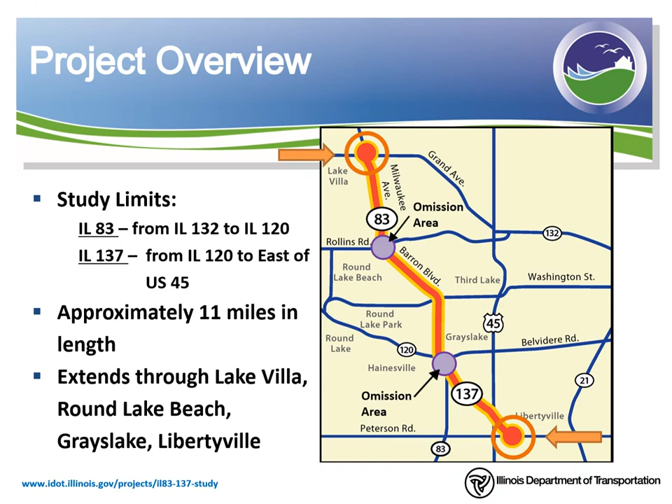This study will identify transportation needs along the corridor, collect information about a variety of resources, develop a broad range of transportation solutions, study and document potential effects, and recommend transportation improvements that benefit residents, businesses, and the traveling public.

Not to be confused with the Restore Illinois phases associated with COVID-19, IDOT develops highway transportation improvement projects in 3 IDOT project phases. The Illinois 83-137 study is currently in Phase 1, in which preliminary engineering and environmental studies are completed to develop an improvement of the roadway that addresses an established purpose and need for the study.

Phase 2, Design, consists of refining the design to develop contract plans and land acquisition. Phase 3, Construction, consists of the actual construction of the project. The contract plan preparation phase, Phase 2, is currently funded and will begin upon completion of the Phase 1 study.

Funding for land acquisition and construction is not included in the department's fiscal year 2020 through 2025 proposed highway improvement program.

IDOT will consider all input from stakeholders throughout the Phase 1 process to support in the development of viable solutions. IDOT utilizes context-sensitive solutions, or CSS, to engage and inform the community. CSS is a collaborative process to involve stakeholders in decision-making. This coordination helps to ensure that the planned improvement fits into its surrounding, also referred to as its context.

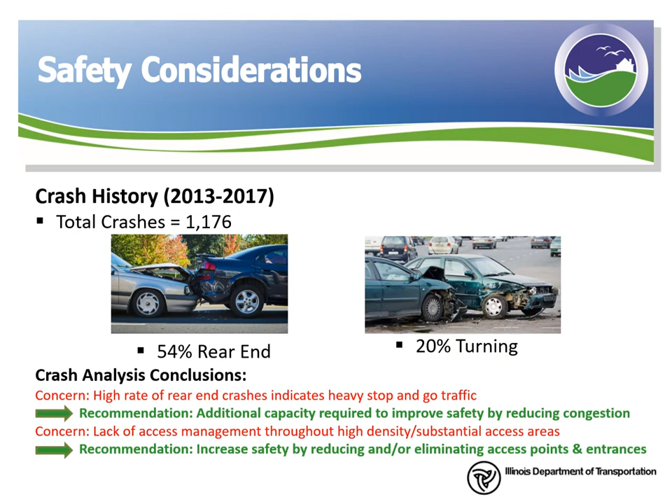To determine the mobility within the corridor, the existing traffic volumes are measured and future volumes projected. The existing needs can then be determined and alternatives developed to provide the capacity to meet the required design criteria. Traffic capacity and the associated traffic congestion are defined in terms of levels of service, or LOS.

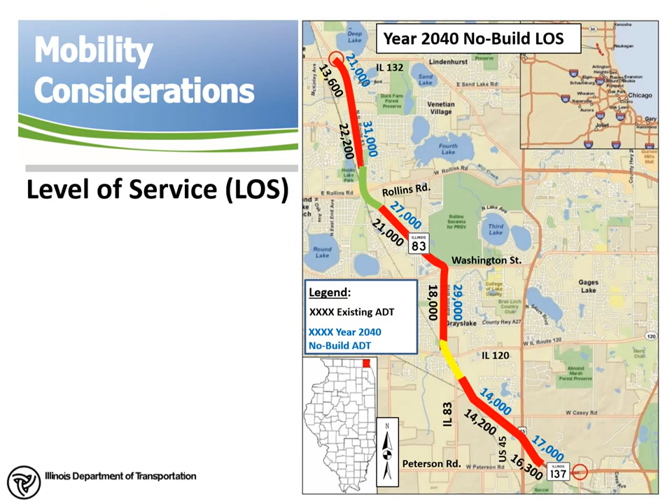The level of service is expressed by a scale ranging from A to F. Level of service A represents the best traffic condition with no backups or obstacles to traffic flow, and F represents a total breakdown in traffic operations accompanied by extensive delays and traffic volumes that approach capacity.

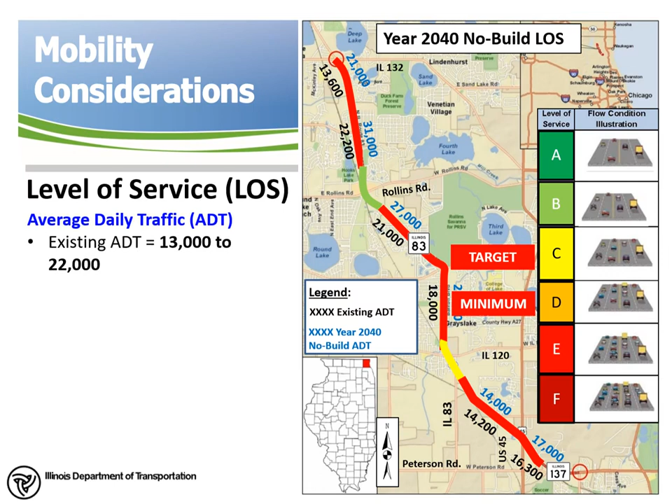The design requires that the projected 2040 traffic capacity along the corridor have a minimum level of service of D and a target LOS of C or higher. The existing traffic volumes along the corridor range from 13,000 to approximately 22,000 vehicles per day and currently have a level of service of E.

The traffic volume is projected to increase to between 14,000 and 31,000 vehicles per day by year 2040. If no improvements are completed, the projected level of service will remain below the acceptable level in most areas along the corridor. The only areas where acceptable levels were found is where 4 or 5 lane improvements have been completed or are planned to be completed.

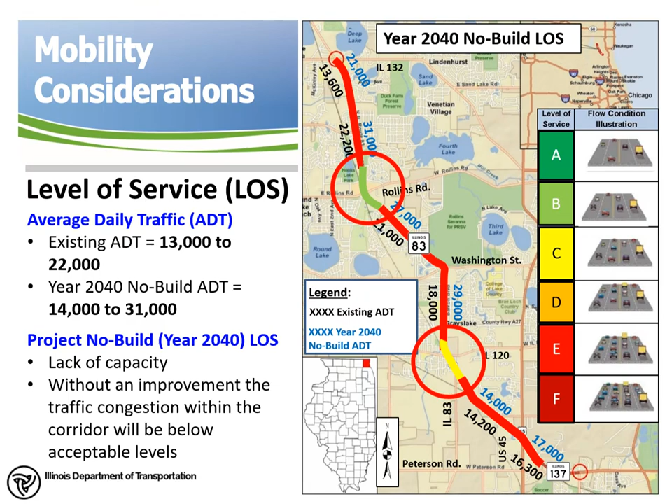Multimodal opportunities were identified as another need along this corridor. Because of the residential and commercial land use found along the corridor, as well as the frequency of parks, schools, bike paths, Metra stations, and intermittent sidewalks within the area, the inclusion of bicycle and pedestrian facilities along the corridor would provide an alternative means of travel and access.

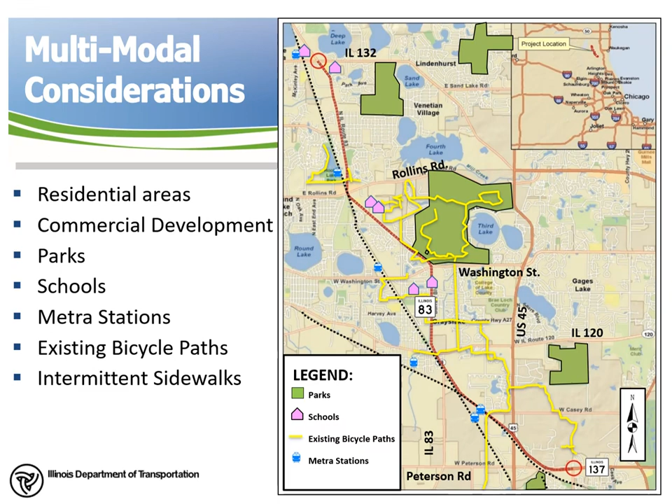The alternative development process is a multi-step process of developing, improving, screening, and eliminating alternatives until a preferred alternative is selected. Throughout this process, IDOT utilizes CSS to keep the community engaged in the project, which helps to ensure the preferred alternatives fit the needs of the community.

The process begins by screening initial alternatives to make sure that they meet the purpose and need of the project and that they do not have fatal flaws. Following this screening, the alternatives carried forward are evaluated in greater detail. Then the alternatives and their associated impacts will be further refined and subsequently screened until a preferred alternative is selected. This is where we are now in the process.

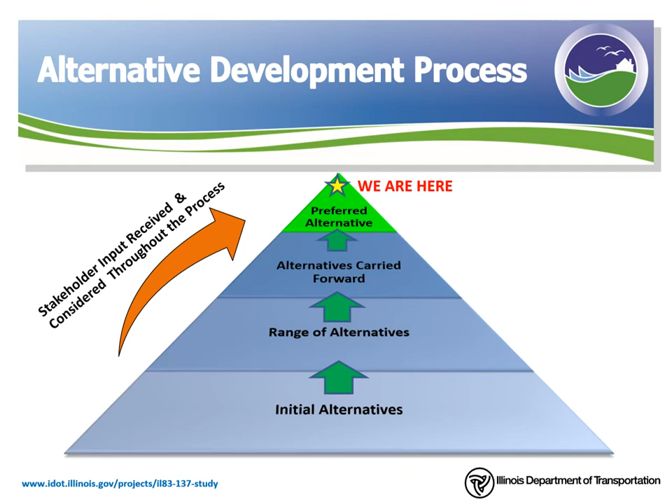The consideration of both environmental resources and engineering design elements found within the corridor is an integral part of developing a range of alternatives that provide viable options for improving the roadway corridor.

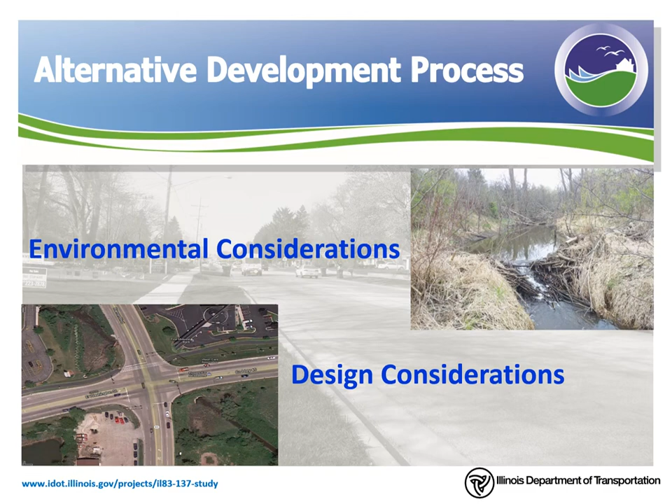This project is being developed in accordance with the National Environmental Policy Act, or NEPA. The environmental impacts of potential alternatives are a critical component to the overall alternative development process. The purpose of NEPA is to ensure that environmental factors are weighed equally when compared to other factors in the decision-making process. For federal funding eligibility, NEPA compliance is required.

A full range of reasonable alternatives are evaluated, including the no-build alternative, along with comprehensive environmental review to avoid, minimize, and mitigate impacts.

Environmental surveys were collected throughout the project area so that we could identify impacts as we develop alternatives. By identifying these environmental features, we can better determine the alternatives that best serve the purpose and need of the project while minimizing environmental impacts.

Environmental features include the following: wetlands, protected species and habitats, floodplains, historic sites and cemeteries, 4F resources, parks, recreation areas and refuges, forest preserves, 6F Land and Water Conservation Fund Act (LawCon) resources, outdoor recreational resources, community and social resources, environmental justice communities, and relocation impacts.

This study is being processed as an environmental assessment, or EA, which assists decision makers in determining if a federal project's impacts are significant. The alternatives will be identified and analyzed to identify the alternative that best meets the needs of the project study area, while avoiding or minimizing environmental impacts. Upon completion of the EA, a finding of no significant impact, or FONSI, is anticipated, which will complete the environmental studies for the project.

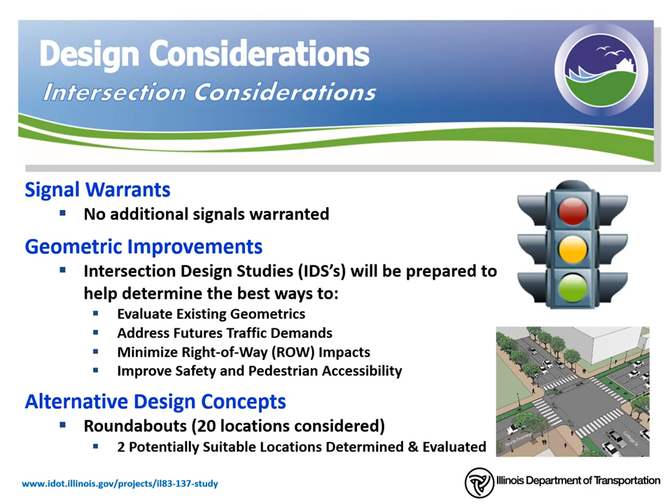The effectiveness of the alternatives depends on many factors, but is evaluated by how well they address the purpose and need. 2 of the primary factors identified in our purpose and need are safety and mobility.

Access management is the control of the location, spacing, design, and operation of driveways, median openings, and street connections to a roadway. The purpose of access management is to help balance safety and mobility by reducing the number of conflict points and traffic congestion.

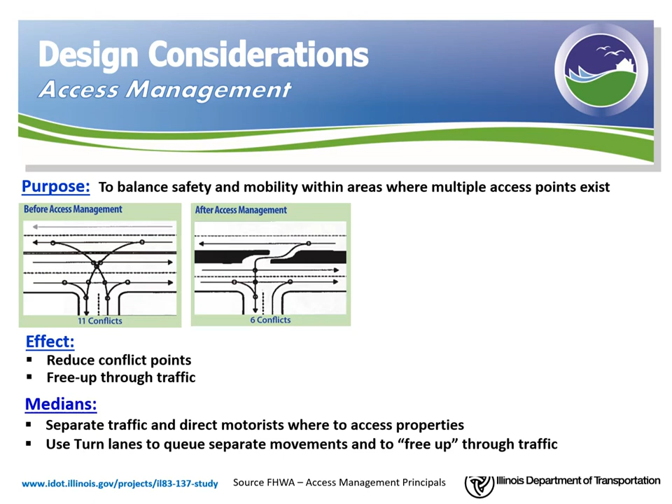An increased number of driveways within a corridor increases the likelihood for crashes to occur. Raised medians are a key tool used for access management. Raised medians separate traffic and direct motorists where to access properties so that turning and crossing movements occur at fewer locations. Additionally, raised medians provide opportunities for improving aesthetics.

U-turn bump outs are provided at locations that were coordinated with local officials to provide additional access opportunities.

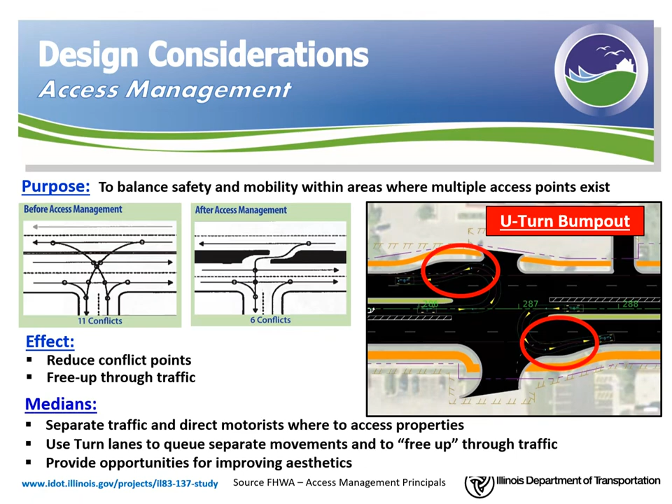The lane configuration was also studied throughout the corridor by developing initial build alternatives, which included a 2-lane alternative with 1 through lane in each direction and a center turn lane, and a congestion management process (CMP) alternative were evaluated.

CMP strategies have been incorporated into this project where practical, including increased turn lane storage capacities, traffic signal modernization, consolidation of access points, streets, and driveways, channelized intersections with left and right turn lanes, adding multi-use paths and sidewalks, and raised curb medians.

3 basic types of 4-lane alternatives, all of which have 2 through lanes in each direction, were also developed. These alternatives include various median types such as a raised curb median, a flush median center turn lane, and a depressed grass median, which is used in low-density development areas with increased speeds.

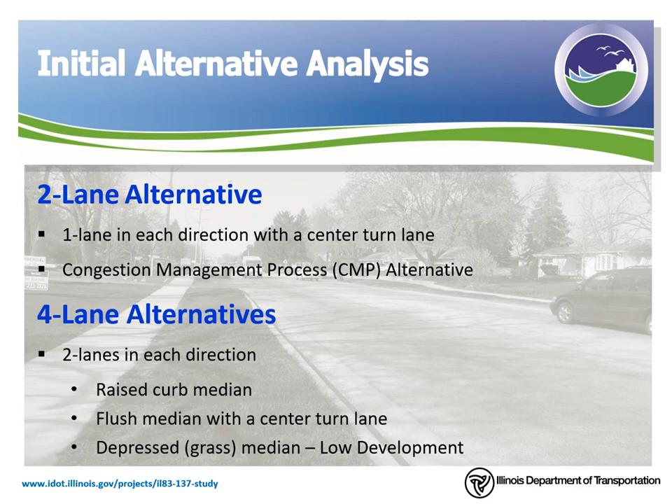To determine the feasibility of a 2-lane alternative, it was modeled to determine its capacity. As previously stated, the design criteria require a projected 2040 traffic capacity level of D or higher. The 2-lane roadway model produced a level of service of E where they were used within the corridor.

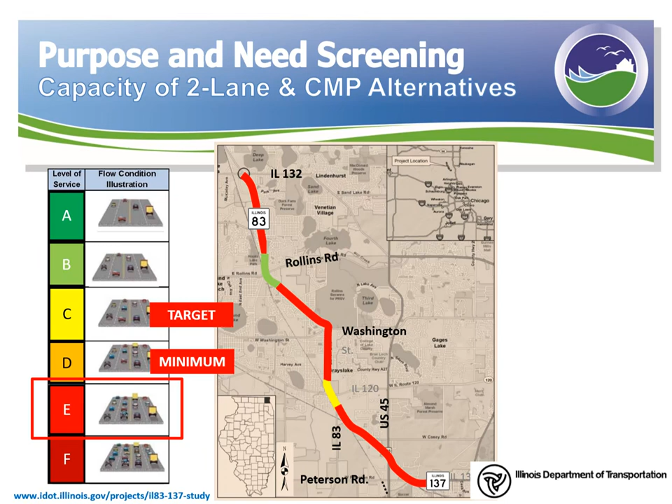The 2-lane alternatives with center turn lane and the CMP alternative were found to not meet the purpose and need of the project because the alternatives retained 1 through lane in each direction, and the additional roadway capacity was determined to be needed in order to improve safety by reducing congestion. Therefore, these alternatives were dismissed from further consideration.

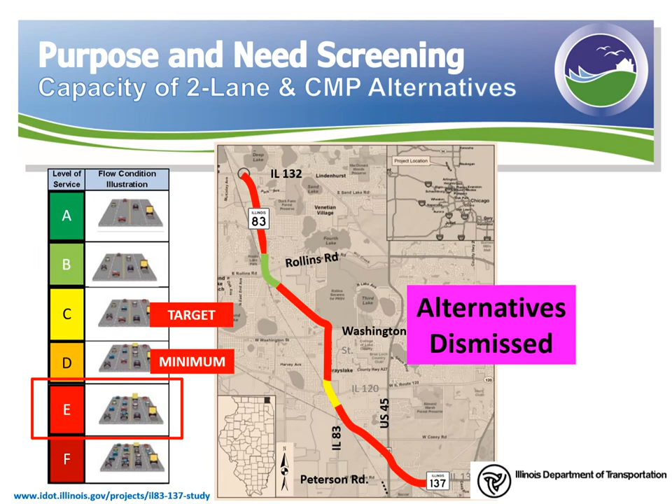Similarly, the no-build alternative does not meet the purpose and need of the project, but will be retained through the environmental review process as a comparison for study.

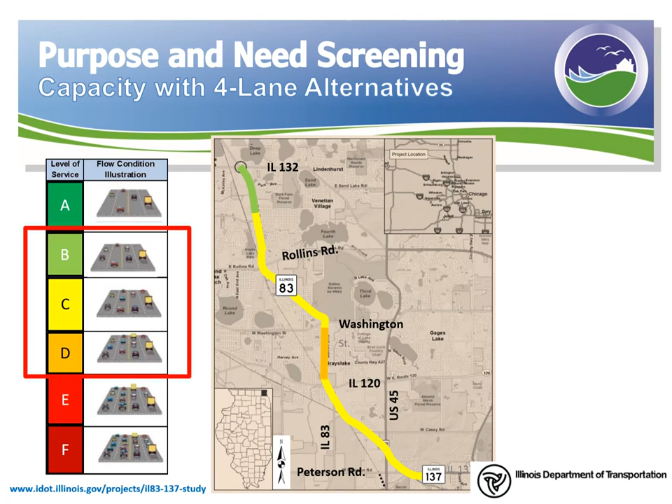To determine the feasibility of 4-lane alternatives, they were also analyzed to determine capacity. The projected level of service in these areas with a 4-lane improvement was found to be between a B and a D. Since the 4-lane alternative provides suitable mobility, 4-lane design alternatives will be used for the range of alternatives.

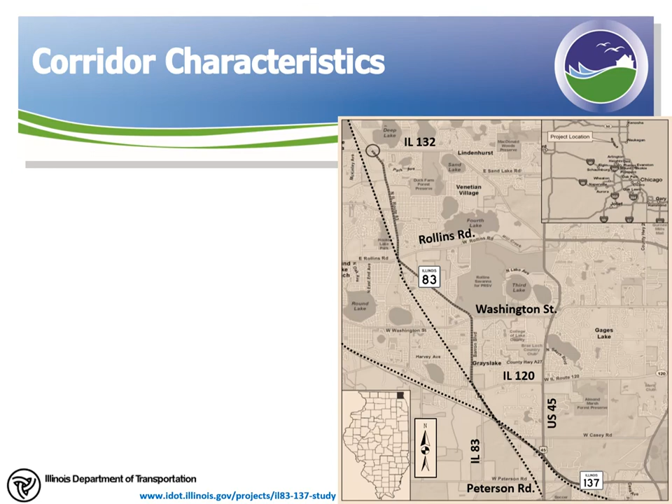The characteristics of the corridor are important to identify the elements used in the alternatives. The land use varies significantly along the corridor. To develop alternatives that more closely align with the land use in the various areas, the corridor was first divided into 3 sections.

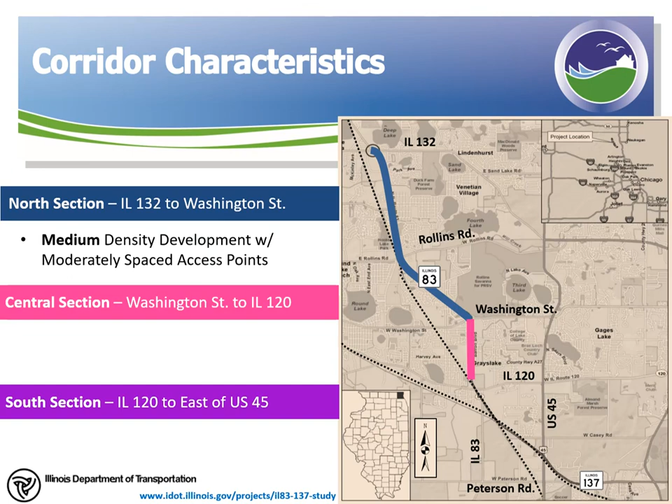These are referred to as the project's north, central, and south sections. The north section extends from Illinois 132 to Washington Street and is made up of medium-density development and property access with speeds of 45 to 55 miles per hour. The central section extends from Washington Street to Illinois 120, is highly developed, and the most densely populated section of the corridor, having substantial property access with reduced speeds of 35 to 40 miles per hour. The south section extends from Illinois 120 to east of US 45, is made up of low-density development and property access with increased speeds of 45 to 55 miles per hour.

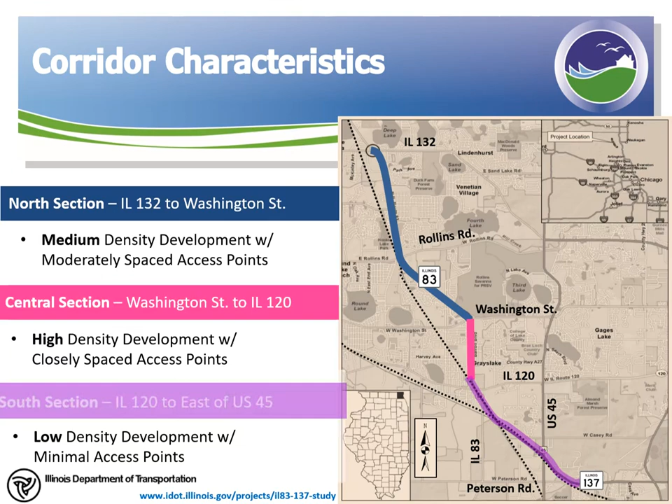By dividing the corridor up this way, we could better focus on the alternatives in those areas that will better serve the community.

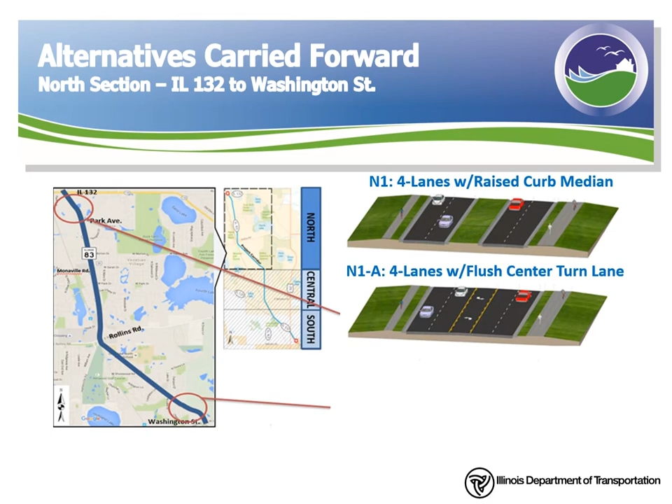In the north section, there are 3 alternatives carried forward. The N1 alternative is a 4-lane cross-section with a raised curb median, which can be considered the typical section throughout the majority of the north section. Due to frequent access points onto Illinois 83, the N1A alternative was created and provides a flush median, center turn lane, in the northernmost section of the corridor just south of 132. This alternative narrows the footprint and would provide more access.

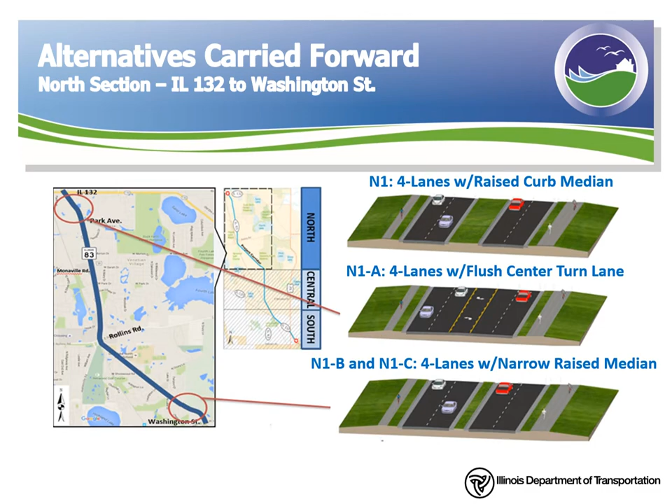Due to environmental concerns, the N1B and N1C alternatives were created and provided a narrower raised curb median with reduced lane widths. All 3 alternatives primarily follow the existing centerline alignment, having outside curb and gutter, and include a multi-use path along the east side of the roadway and a sidewalk along the west side of the roadway throughout the length of the section.

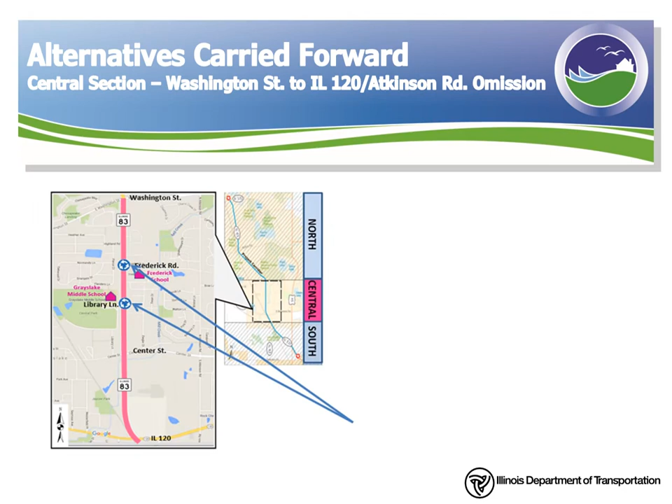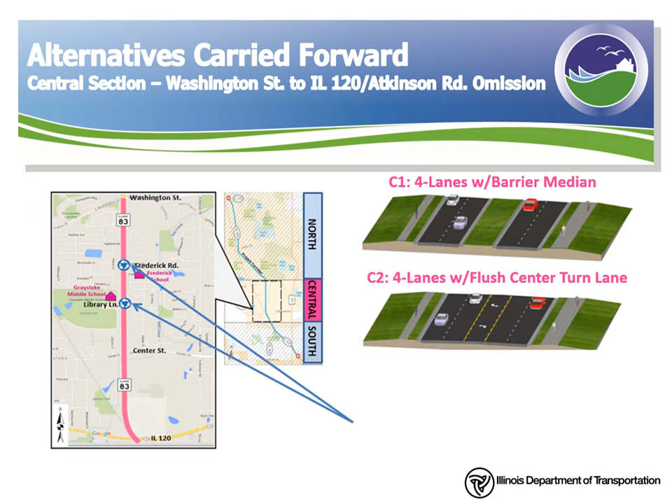In the central section, 3 alternatives were carried forward. The first alternative replicates the 4-lane cross-section in the north section with a barrier median. The second alternative is a 4-lane roadway with a flushed median center turn lane. The third alternative is a 4-lane roadway with a narrower raised curb median and roundabouts at the intersection of Frederick Road and Library Lane.

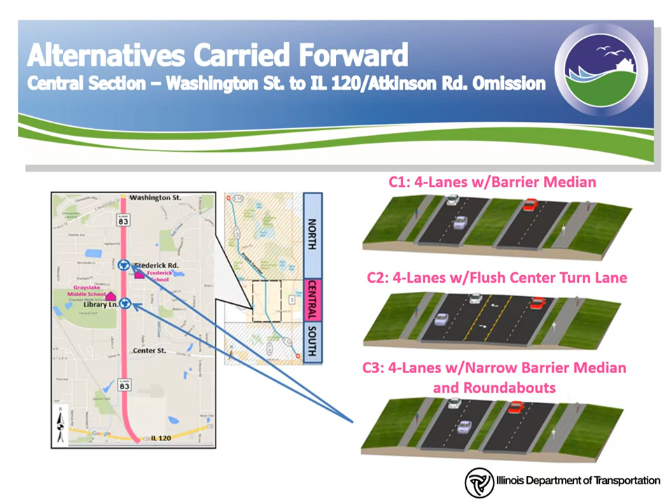All 3 alternatives primarily follow the existing centerline alignment, have outside curb and gutter, and include a multi-use path along the east side of the roadway and a sidewalk on the west side of the roadway throughout the length of the section.

In the south section, an alternative was first developed that provides 4-lane roadway with a standard width depressed grass median, outside paved shoulders and ditches, and a multi-use path along the east side of the roadway. The entire south section is parallel and adjacent to a railroad that puts constraints on right-of-way.

Therefore, to reduce the right-of-way impacts, the S2 alternative was developed with a narrower depressed median. This alternative reduced impacts significantly, allowing the standard width alternative to be eliminated from further consideration. This alternative is the primary design used throughout the south section.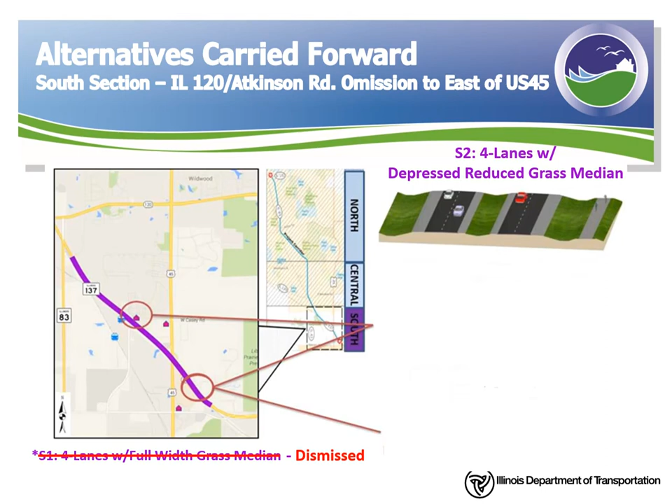In areas of residential development, the 30-foot median alternative was refined to provide alternatives that further reduced impacts. These include an alternative S2A that places the multi-use path along the edge of the shoulder, as well as an alternative S2B with no path along the roadway in the further southernmost section.

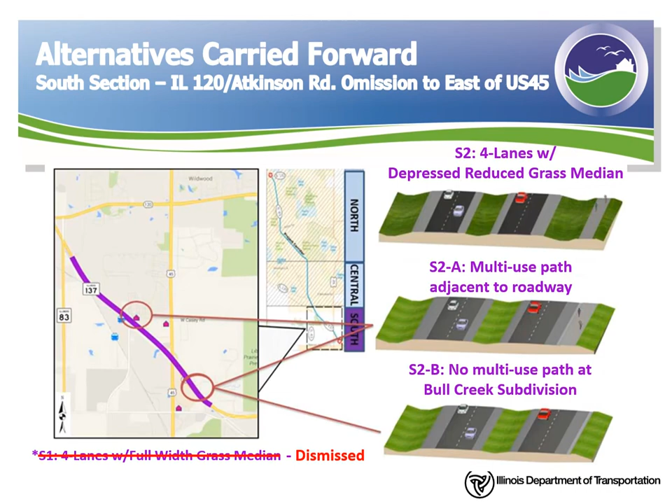Multiple alternatives were studied during the Alternatives Carried Forward process. A hybrid alternative was created that combines the least environmental damaging concepts and/or locally preferred designs for each section of the corridor while meeting IDOT safety and geometric specifications.

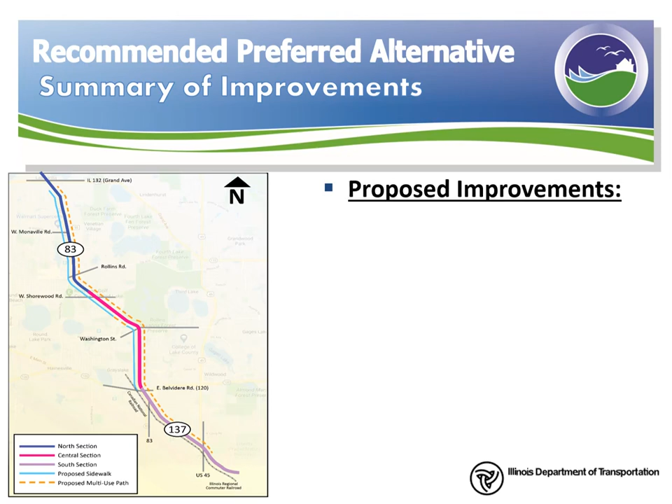The recommended preferred alternative is the alternative that best meets the project's purpose and need while balancing and minimizing impacts to environmental resources. Generally, the recommended preferred alternative consists of constructing a 4-lane roadway section with varying median types throughout the corridor. As shown on the map, a multi-use path will be located on the east side of the roadway and a sidewalk will be located on the west side of the roadway in the north and central sections from Illinois 132 to Illinois 120.

There is only a multi-use path through the majority of the south section. Drainage improvements and best management practices, BMPs, are also being included in the improvements. The following slides will go over the recommended preferred alternative for all 3 sections along the corridor.

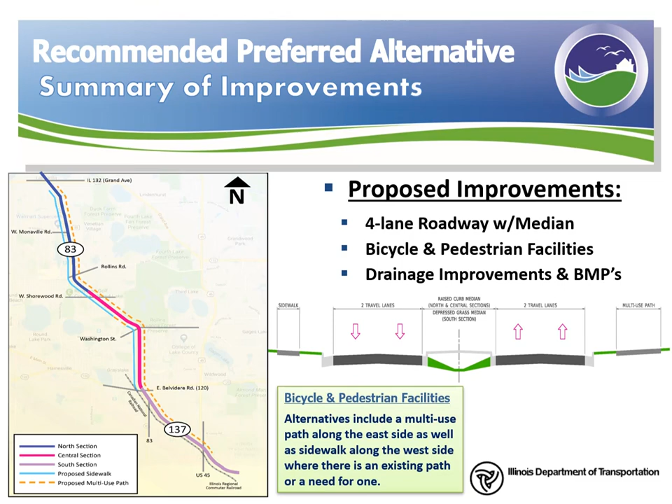In the north section, the recommended preferred alternative is a flush median center turn lane in the northernmost portion from Illinois 132 to Bretons Drive to allow for access to the businesses in this area. South of Bretons Drive to Washington Street provides a raised curb median with left turn lanes provided at access points. A proposed sidewalk and multi-use path are included throughout the north section.

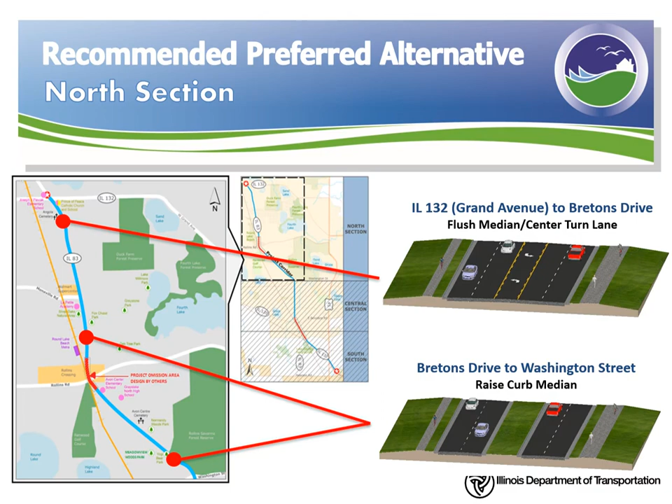In the central section, the recommended preferred alternative from Washington Street to Illinois 120 omission area consists of a raised curb median with left turn lanes provided at access locations. U-turn bump outs are provided at locations that were coordinated with the local officials to provide additional access opportunities. A proposed sidewalk and multi-use path are included throughout this section.

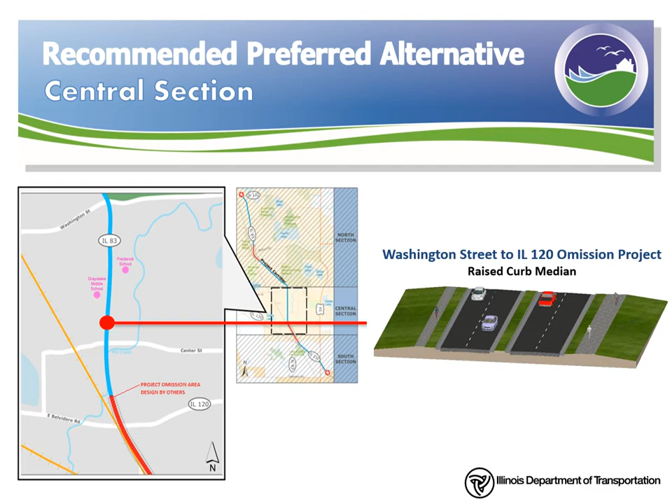In the south section, the recommended preferred alternative from Illinois 120 omission to US 45 consists of a depressed grass median, and from US 45 to south of Bull Creek Drive consists of a raised curb median with left turn lanes provided at access locations. The sidewalk in the south section has been eliminated to reduce impacts to the Canadian National Railroad right-of-way. To further reduce right-of-way impacts, the proposed multi-use path along the corridor ends north of Bull Creek subdivision.

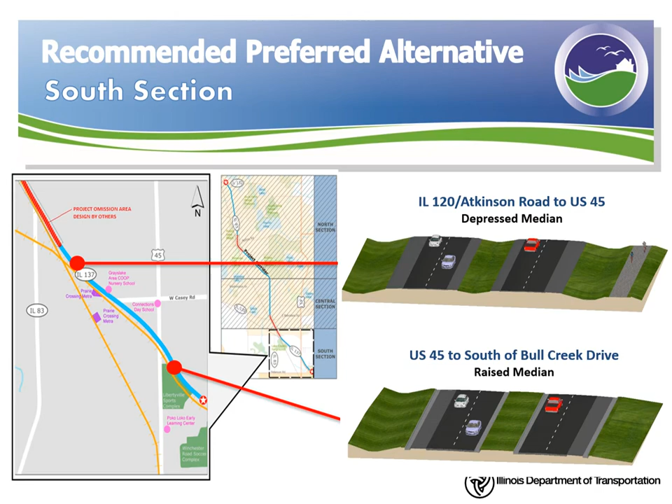There will be land acquisition required to construct the preferred alternative. The three types of land acquisition are fee simple acquisition, permanent easements, and temporary easements. A fee simple right-of-way acquisition includes the purchase of all rights and interests on the property. With a permanent easement, ownership is retained by the property owner, but the agency is allowed access for perpetual use. With a temporary easement, ownership is retained by the property owner, and the land is only temporarily used during construction for items such as grading work, driveway construction, and landscaping restoration.

The land acquisition process involves the following sequence of steps. First, the ownership of the property is confirmed. A plat of survey drawing is prepared to show the dimensions and amount of property that is being acquired, and an independent appraisal is made to determine the fair market value of the property to be acquired.

Second, negotiations begin with an offer to acquire the necessary property at the appraised value. Third, if a settlement cannot be reached, the matter is referred to the courts for acquisition under the law of eminent domain. Fourth, relocation assistance is provided when a building or structure is being acquired.

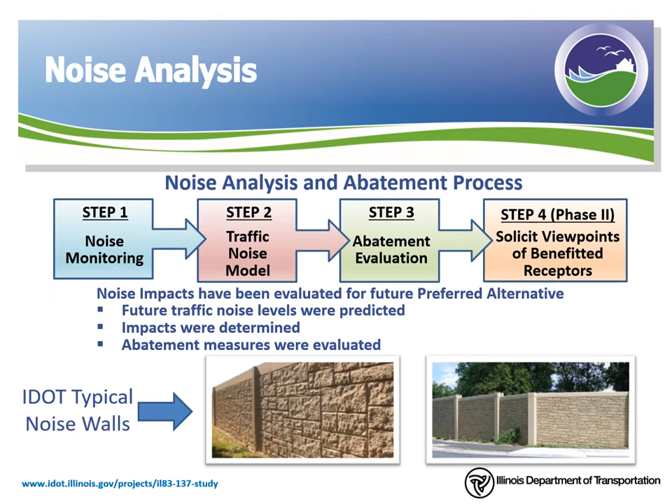We hope this information has been helpful in understanding the Illinois 83-137 study and where we are in the process. Your input is very valuable to the project study.

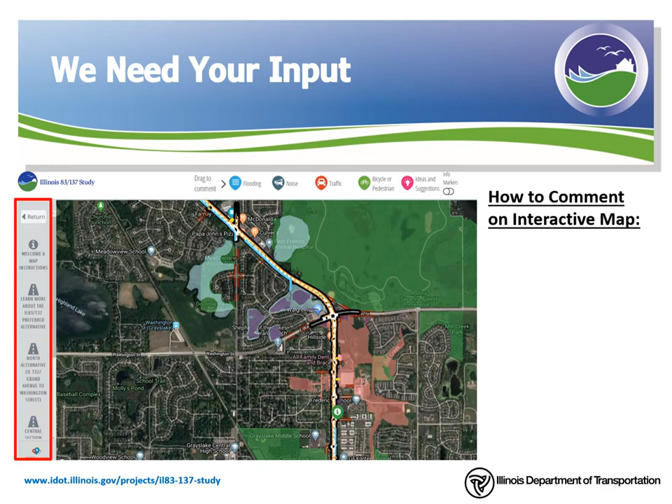You will see five icons at the top of your screen. Comments can be made on any tab by dragging one of the icons to the location of interest. The final step, Step 4, is a separate tab on the interactive website homepage that gives the public another opportunity to share any additional comments and ideas about the Illinois 83-137 study.